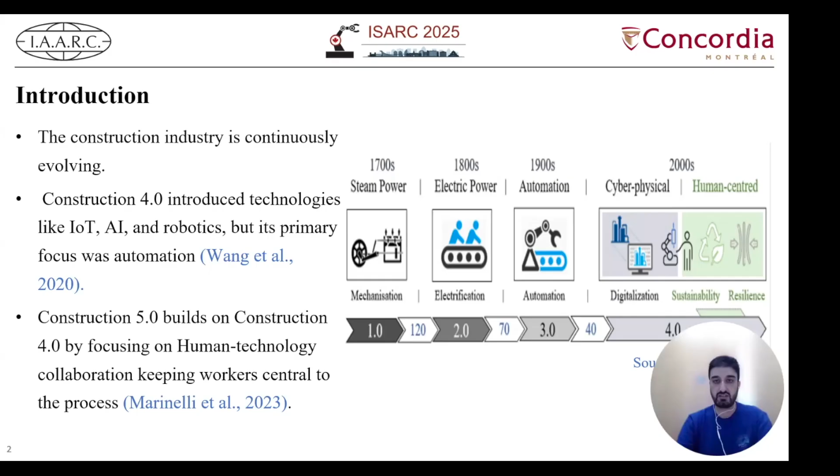So what is 3D concrete printing? It is a construction technology that works by extruding materials layer by layer through a nozzle, creating a structure with minimal manual effort based on a digital model. Several studies have highlighted its alignment with Construction 5.0 goals individually, like sustainability, resilience, human centricity, cost control, but a comprehensive framework for assessing its full integration is lacking.

Also, 3D concrete printing offers key drivers such as material saving, reducing carbon footprint, enhanced adaptability, and improved worker safety. So there is limited research on identifying and evaluating the key drivers that enable 3D printed concrete technology to align with all the Construction 5.0 criteria. So there is a need for empirical validation to confirm its real-world application. So this research aims to fill that gap.

The key objective of this study is to develop a framework to assess the alignment of 3D concrete printing technology with the Construction 5.0 criteria and to propose a conceptual implementation framework for 3D concrete printing technology in the construction industry.

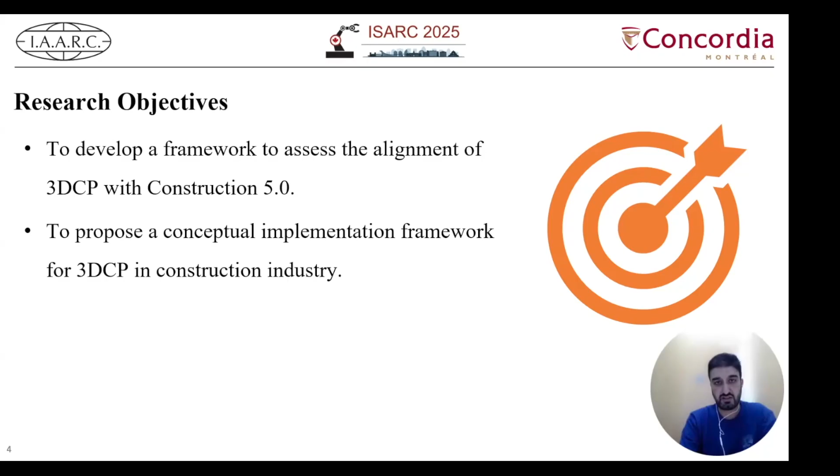The methodology used for this research comprises four key steps. First, a comprehensive literature search was conducted across major academic databases such as Scopus, Web of Science, Google Scholar, mainly focusing on peer-reviewed journal articles, conference papers, and review articles published since 2015. The keywords included to search the articles were 3D concrete printing, Industry 4.0, Industry 5.0, construction, and digital construction.

The second step of the methodology is identification of the Construction 5.0 criteria. Construction 5.0 mainly focuses on integrating human centricity, sustainability, resilience, and cost and environmental control into the construction process. The third step was the identification and content analysis of key drivers. For this purpose, 20 academic papers were thoroughly reviewed to identify the key drivers that enable 3D concrete printing to meet the criteria of Construction 5.0.

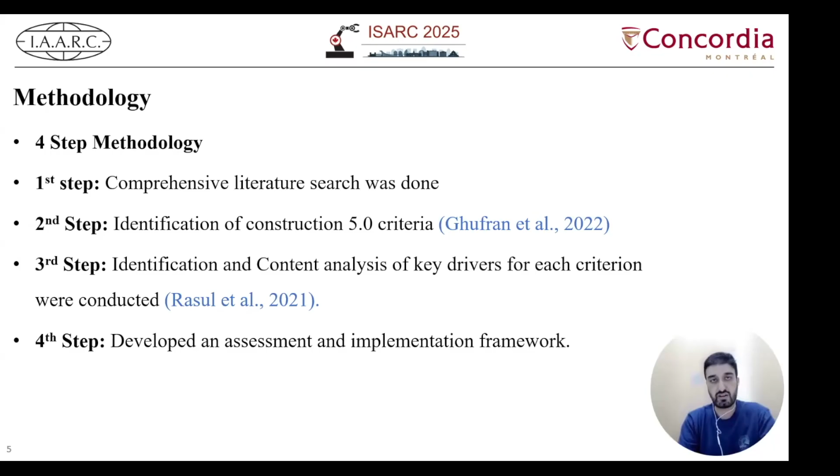The last step is the development of the assessment and implementation framework based on the identified drivers. The assessment framework provides a structured methodology for evaluating 3D concrete printing alignment with Construction 5.0 goals, focusing on the measurable impact of the key drivers, while the implementation framework outlines a three-phase process: number one is knowledge building, number two is adoption, and number three is performance assessment for integrating 3D concrete printing technology into the construction industry.

After that, the significance S of each driver was assessed based on its frequency in the literature and categorized as high, medium, or low. A quantitative score was then assigned, 5 for high, 3 for medium, and 1 for low, to quantify its relative importance for further analysis. Then each driver is ranked based on the literature score derived by content analysis, in which the influence of each driver, high, medium, or low, is determined through examination of the literature score.

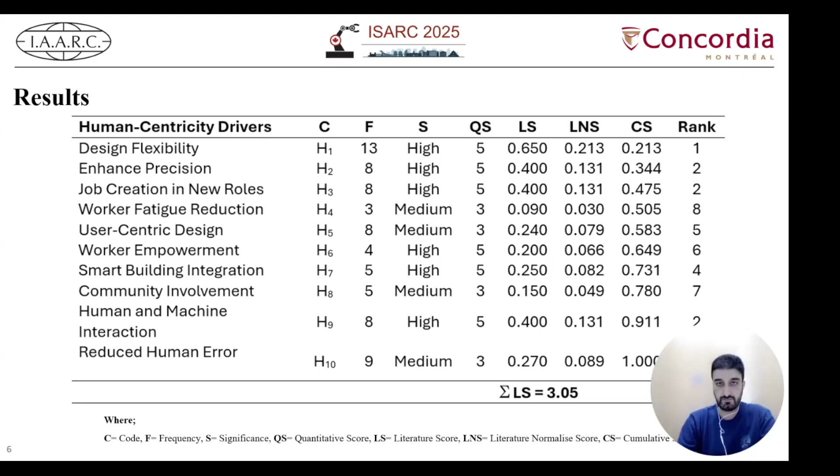Like human-centric criteria, we identified the 10 drivers for that. Similarly, we identified the 10 drivers for the sustainability criteria. And we perform a similar kind of analysis where C represents the code, F represents the frequency, S represents the significance, QS represents the quantitative score, LS represents the literature score, LNS represents the literature normalized score, and CS represents the cumulative score, and then rank.

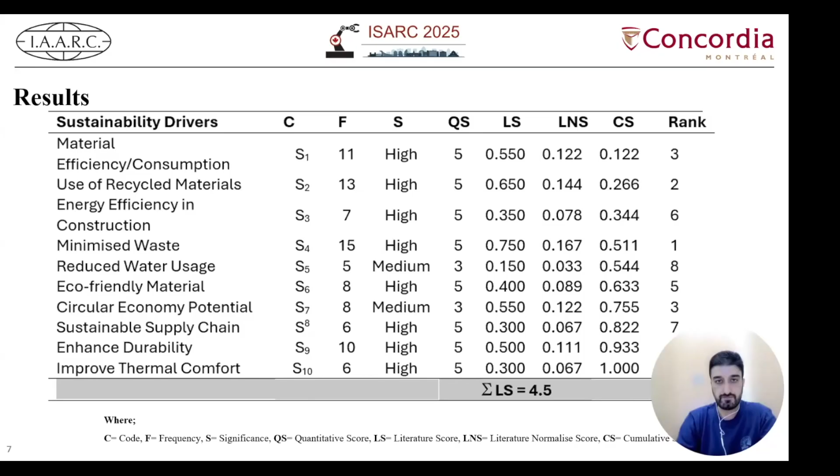A similar kind of analysis was carried out for the sustainability criteria as we carried out for the human-centric criteria. Again, similar as we identified the four main core criteria for Construction 5.0. So this is the third criteria, resilience drivers. 10 drivers are identified for the resilience driver in order to align the 3D printed concrete technology with the Construction 5.0 criteria. So a similar kind of analysis was performed as we performed for the previous two criteria.

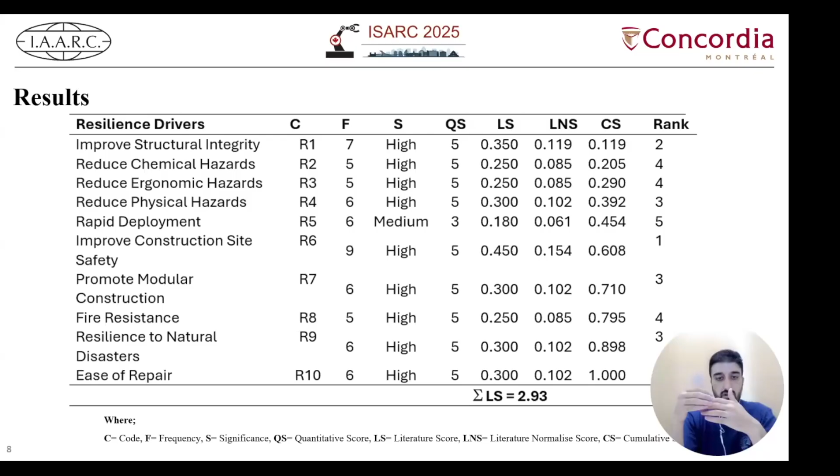This is the last criteria for Construction 5.0, which is reduce cost and environmental control. 10 key drivers were identified for this criteria, and a similar kind of analysis was performed as we performed for the previous three core criteria of Construction 5.0.

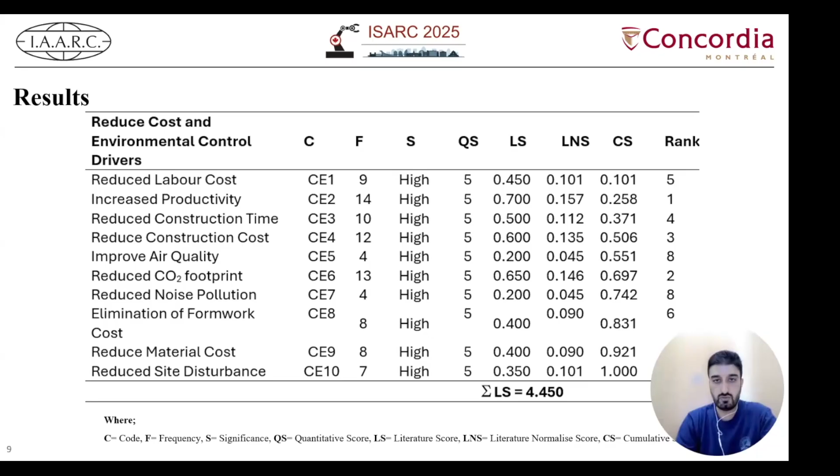By identifying these key drivers under each criteria, we are able to assess how 3D concrete printing can support the goals of Construction 5.0. This framework provides a structured way to evaluate how 3D concrete printing technology meets the specific requirements of human centricity, sustainability, resilience, and cost and environmental control, and helps to prioritize these drivers based on their significance and impact on the construction processes.